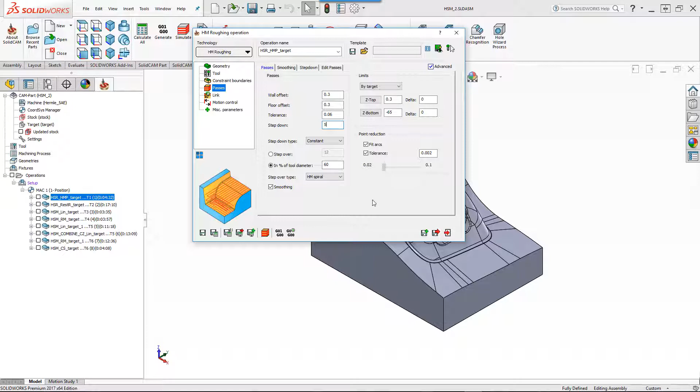If we take a look at the simulation, you'll see the following. The tool will be working from the outside of the part, machining exactly the way we want it to, from one side to the next, always from the outside of the part.

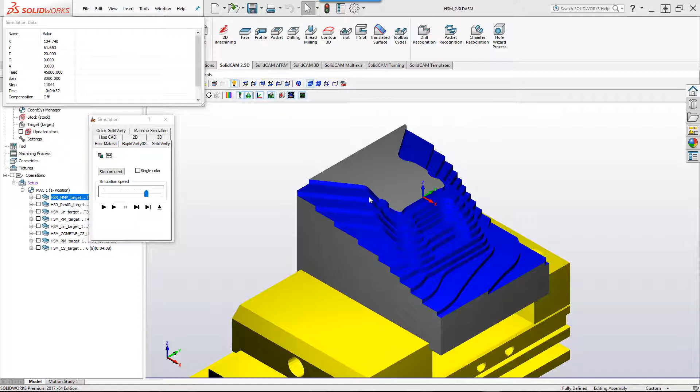Now in our next operation, we'll be doing a rest rough operation to clear off these large steps that we've created here, plus allowing it to go into areas where this tool was not able to go, by using a smaller end mill. So if we go into that operation, you'll see that we're using the option of rest roughing. The tool in this particular case will be a 12 millimeter ball nose end mill.

And if we go into our passes, you'll see we'll still be keeping the same wall and floor offset. However, our step down this time is every 2 millimeters instead of 5 millimeters. This way it will clear off those steps, making them into smaller steps, making it easier to work on when we're doing our semi-finish and finish operations.

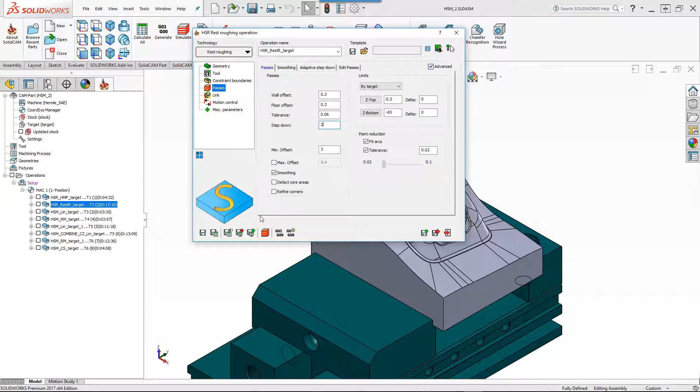Let's take a quick look at the simulation itself, and you'll see that this time the tool is working only in those areas and making the steps smaller as it goes down the part, working only on the stepped areas. As you can see, it's going down now over here, and you saw also that it worked in this area where the previous end mill was not able to go.

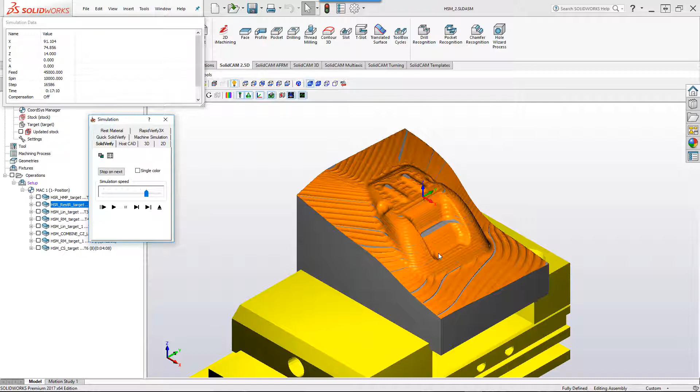Now in our next operation, we'll be doing a semi-finish to take off the material that we have here and get it as close as possible to the actual finish, allowing the finish to give a much smoother finish to the part, and also taking off a lot of the pressure that you may have on the finish tool.

So if I go into the operation, first you'll see that I'll be using the option of linear machining, and I've also used the apply fillet option so that we don't have any sharp corners as the tool path goes into the corners. The tool in this particular case will be a 10 millimeter ball end mill. Let's go into the passes. In the passes, you'll note that our wall offset is set at 0.1 millimeters, getting it ready for the finish cut. And our step over will be every 2 millimeters.

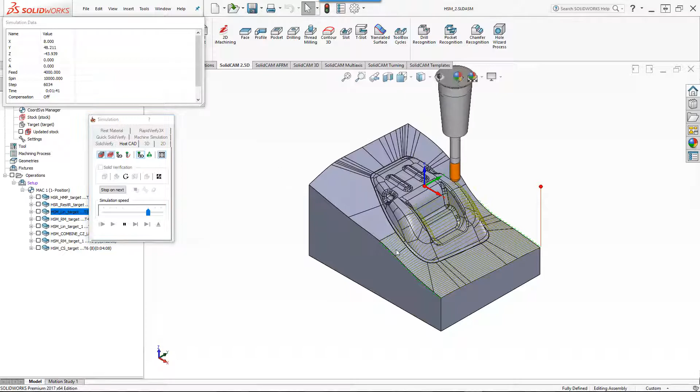Let's take a look at the simulation, and you see that the tool path goes across in a linear fashion, and you can also note that in these corners over here we have a radius on the tool path. This is because we did an apply fillet, allowing the tool to do a fillet move in the corner instead of having a sharp turn into the material itself.

Now in the next operation, we'll be doing again a semi-finish rest machining for these corners. If we go into the operation itself, you'll see we'll be using the option of rest machining. The tool will be a 6 millimeter ball end mill, and the reference tool will be set at 12 millimeters. This way it controls exactly where we want to have that tool work. If we go into our passes, since we're doing the semi-finish, we will still be working with a wall offset and a floor offset of 0.1 millimeters.

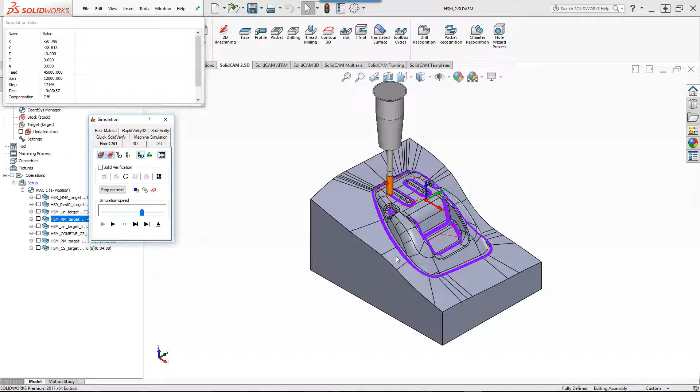If we take a look at the simulation, you'll see that the tool path is being created just in those areas, and since it's doing a semi-finish, it's getting it ready for the finish operation, making it easier later on for the finish operation to remove the material that's left over there.

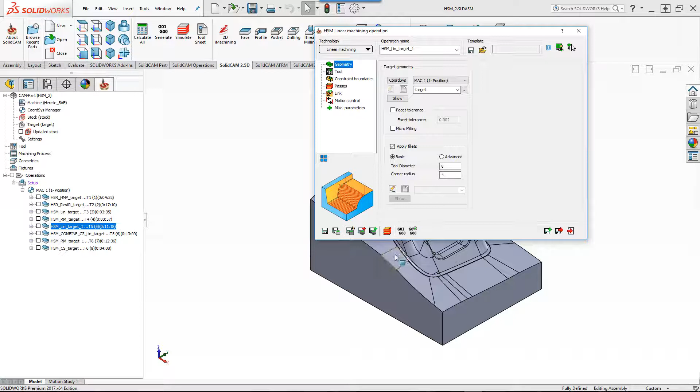Now, the rest of the operations that I will be doing will all be finish operations. So first, let's start off with the linear operation that I've done over here. And again, I'll be using an apply fillet so that the tool will always work on a radius when it gets into the corners. The tool itself will be a 6 millimeter ball end mill.

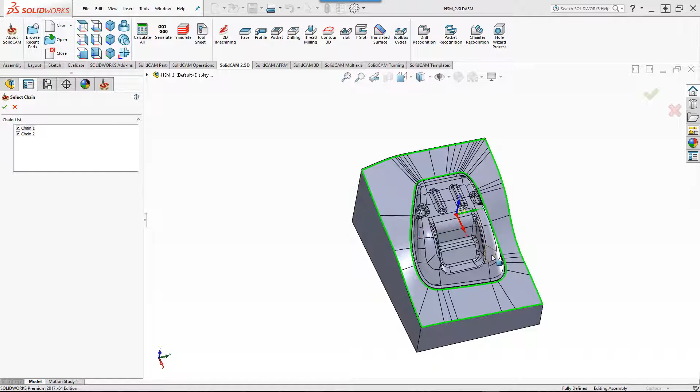And if we take a look at our constraint boundaries, this time we'll be working only in this area on the part itself, between this and the actual core itself. The core will be done in a different operation. In the passes, you'll note that the wall offset is set at 0. That means we'll be doing a finish cut. And we have a step over of 0.2 millimeters, allowing for a nice, smooth operation.

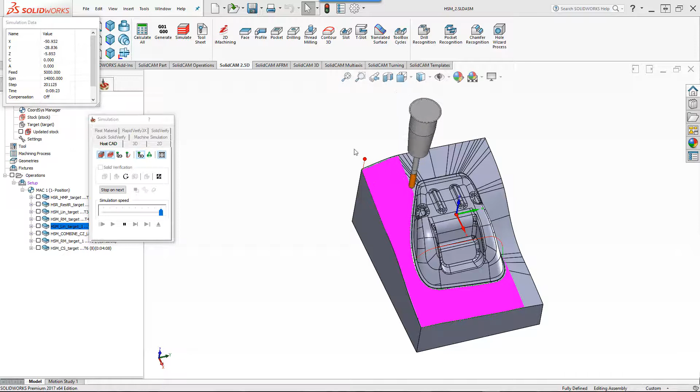If we take a look at the simulation, you'll see the toolpath working only in those areas in a linear fashion, going back and forth. And when it gets to the area where we have the core, it'll actually work around the core itself, exactly up until the borders of that part, giving a really nice smooth finish, since we did a 0.2 millimeter step over on the part itself as it completes the entire part towards the very end.

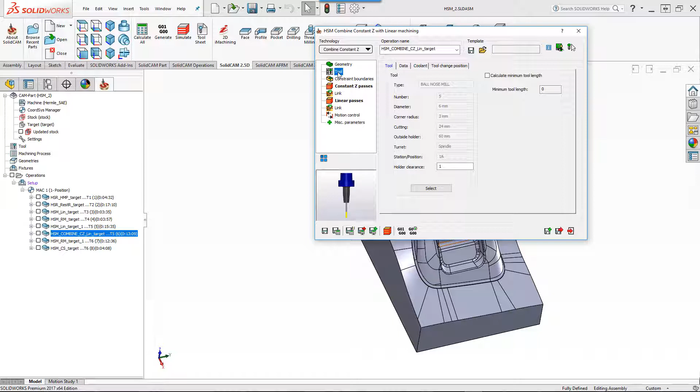Now in the next operation, we'll be doing a combined constant Z with linear to complete this area over here. So if I open up the operation, you'll see we're doing combined constant Z with linear machining. Again, as far as our geometry goes, we've added the option of apply fillet to allow corners to be milled with a radius fillet automatically. The tool, again, will be the 6mm ball end mill. And in this particular case, the constraint boundary is only this area in here.

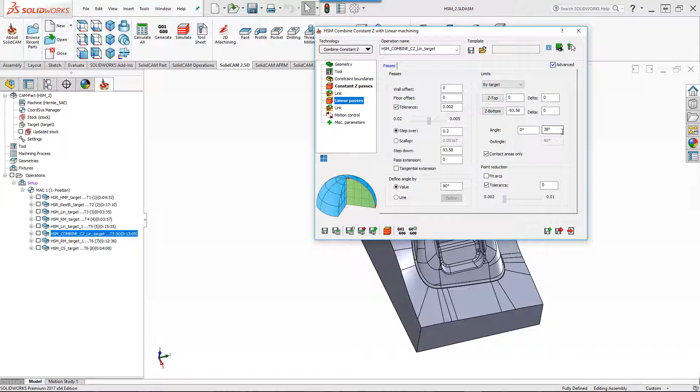Now, if we go into our constant Z passes, you'll see we have the wall and floor offset set at 0 for the finish. And we've limited our working angle to between 35 and 90 degrees, as we only want to work with the constant Z in the steep areas. In our linear passes, we'll be working from 0 to 38 degrees, giving a 3-degree overlap. And one more thing should be noted: we've defined the angle of our working direction so that it works in this direction along the part when it works linear.

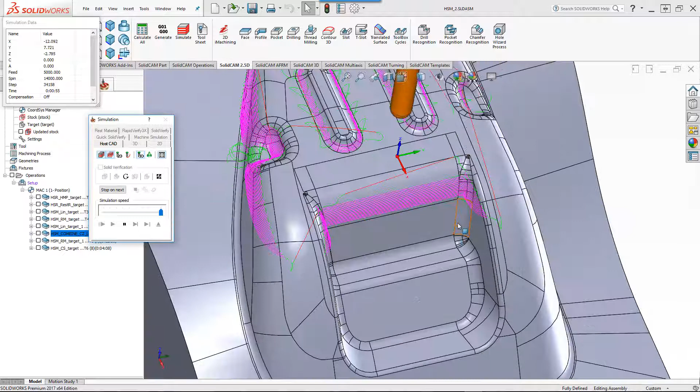Let's take a look at the simulation. It starts off by doing the constant Z, only working on the steep areas. And you can also note that when it works in these steep areas and gets to the corners, there's an actual fillet there, and that's because we used the option of apply fillet. When it finishes those areas, it'll then start the linear option. But first it's doing the constant Z. Note, it's skipping over this area, which is a flatter area, but working around those areas until it gets to the very bottom of the part.

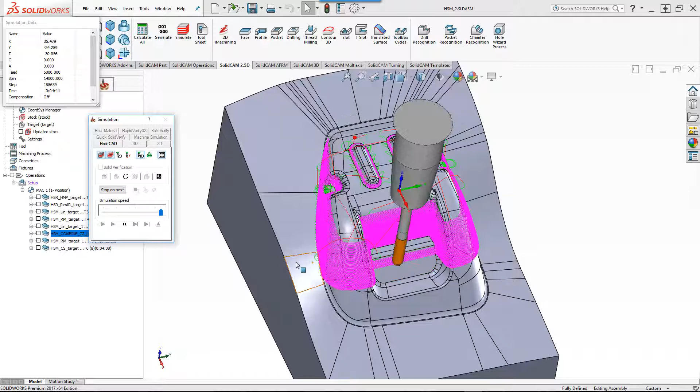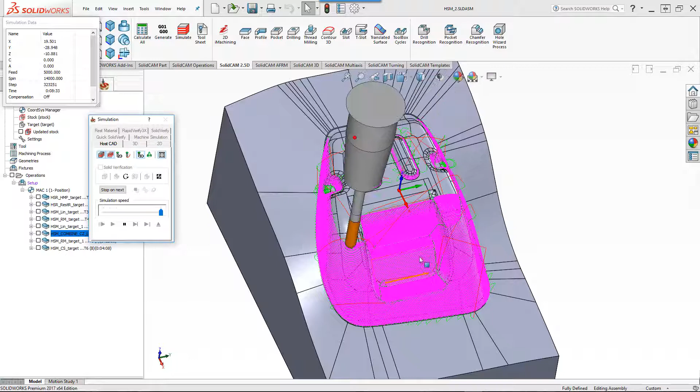And once it finishes that, as I said before, it'll start doing the linear cuts. Again, you can see that it skipped over this area because that's a flatter area meant for linear machining. And now it's going to start working linear. As you see, linear back and forth in this direction, the same thing as it goes up on the part, completing that area until it gets to the very end.

Now, in the next operation, I'd like to do the rest machining on these corners over here, as well as these areas over here. In other words, all the corners I'd like to do now using rest machining. So if I go into rest machining, I've used a 4mm ball end mill, and the reference tool in this particular case was 8.2 millimeters, which controls the area where the 4mm ball end mill will actually work.

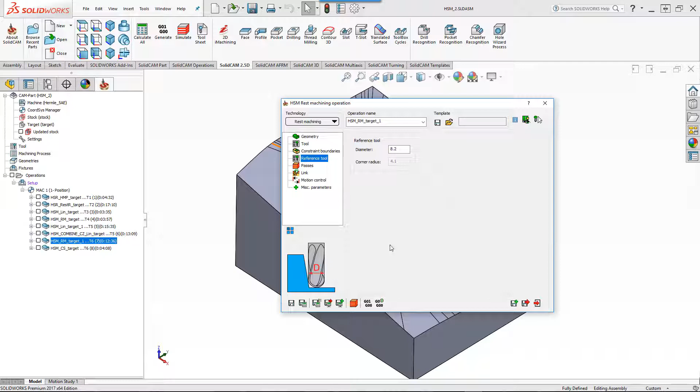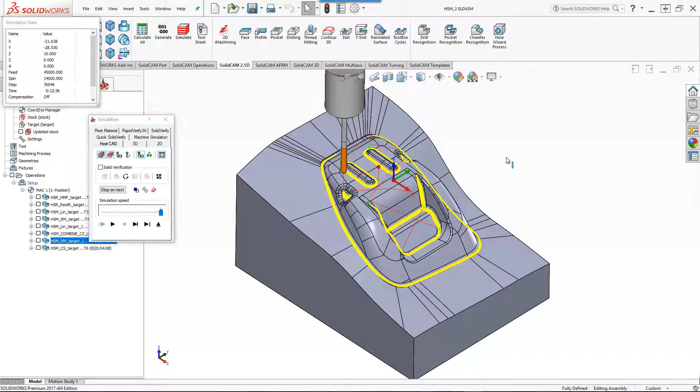If we take a look at the simulation, you'll see that the end mill will work exactly on all of those radiuses on the entire part, including on top and inside over here, completing all those corners. Now, there's still one area where I'd like a nicer finish, and that's this area over here, as well as the one on the other side. So for that, we've used a different operation in HSM called 3D constant step over.

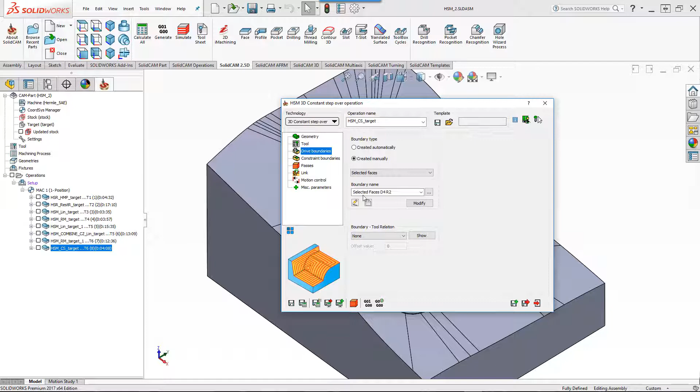In this particular case, we will be using the 4mm ball end mill, and if we take a look at our drive boundaries, we will be working only in these areas. If we look at it from the top view, only inside those areas. Those are the drive boundaries, and that's the shape it'll actually work in. And the constraint boundary is the exact same area, only working within those areas.

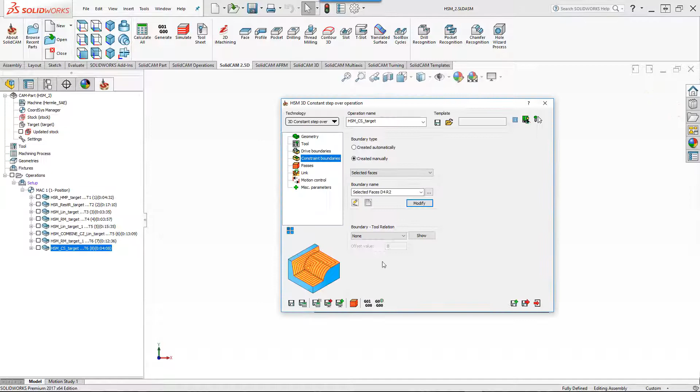If we take a look at the actual simulation, you'll see that the toolpath works exactly in those areas with a constant step over, making for a really nice smooth finish on this side as well as the flip side over here, finishing the entire part.